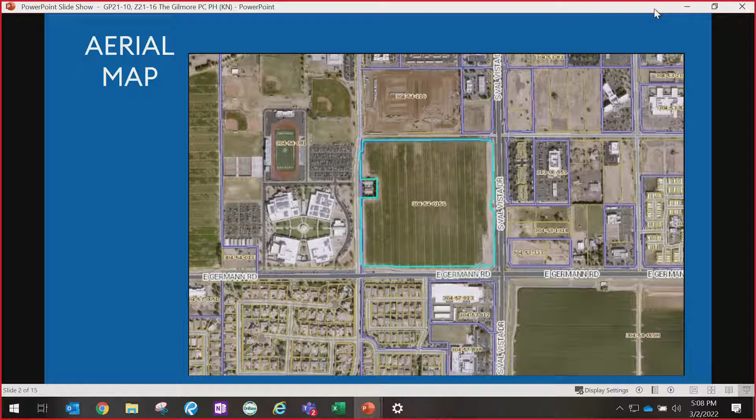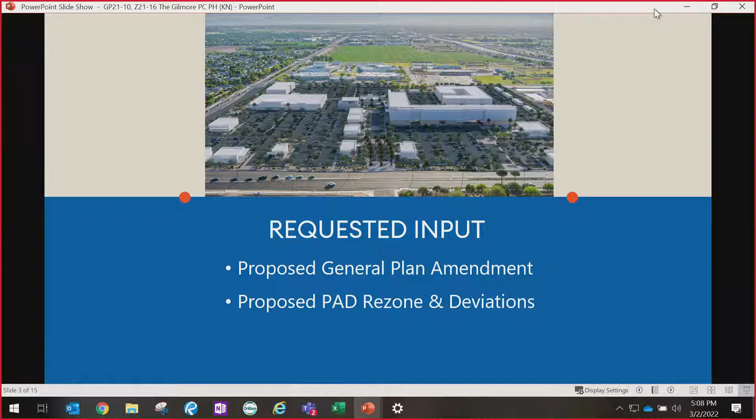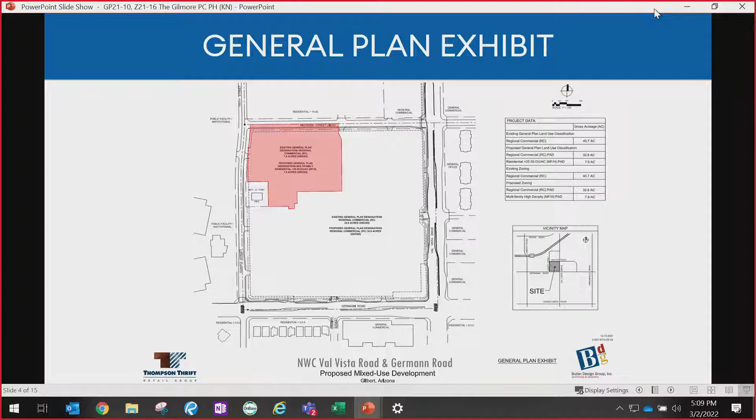So the input we're requesting tonight concerns the proposed general plan amendment, the proposed PAD rezone, and the deviations the applicant is requesting. As you can see, they're proposing a general plan amendment from regional commercial over the whole site currently, to change that red piece in the corner, about 7.8 or 7.9 acres, from regional commercial to residential, 25 to 50 dwelling units per acre. The rest of the site, about 32 acres shown in white, will remain regional commercial, and that designation will not change.

So the zoning on that little red piece I showed you will be changed. They're proposing to change it to multifamily high residential with a density range—I'm still trying to get final numbers on this—but it's going to be a little over 30 dwelling units per acre for that piece. I'll still provide more clarification and final numbers when it comes back for public hearing. The rest of the site is already zoned regional commercial, and they're not proposing to change the zoning, but changing it from regional commercial conventional to regional commercial with a PAD for the rest of the site.

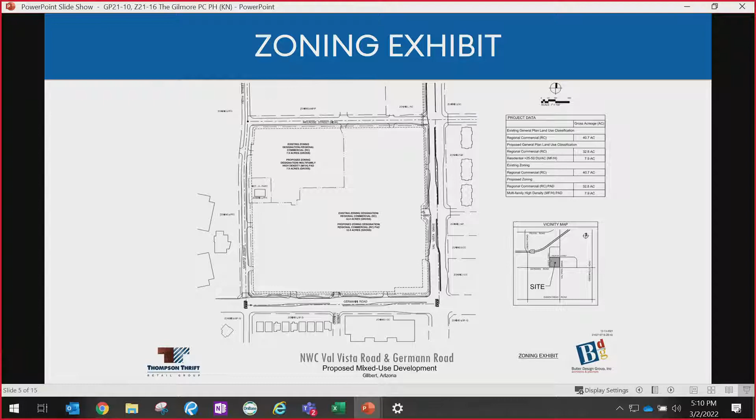So here's the proposed development plan: a total of 40 acres for the whole development, with approximately 206,000 square feet of commercial. Broken down: 65,000 square feet for a grocery store, 33,000 square feet for retail below residential—that's the loft-above type product on the site, wrapping the MFH in that far northwest corner, shown as 4-story residential retail. That's where the retail is in the loft above. Then there's 24,880 square feet of standalone shop space.

And then there's this piece behind the grocery store, labeled office 2-story. They're going to make that more general for flexibility in use, since they don't know what it will be yet, but that's 2.7 acres of land for some future commercial office type development they'll lock down later. The total residential units on the site are 302 units in that northwest corner, in 4-story apartment buildings.

And then in front of that, to the east and a little bit to the south, they have the loft above residential, and those are also 4-story buildings with retail on the ground floor and residential on the top 3 floors.

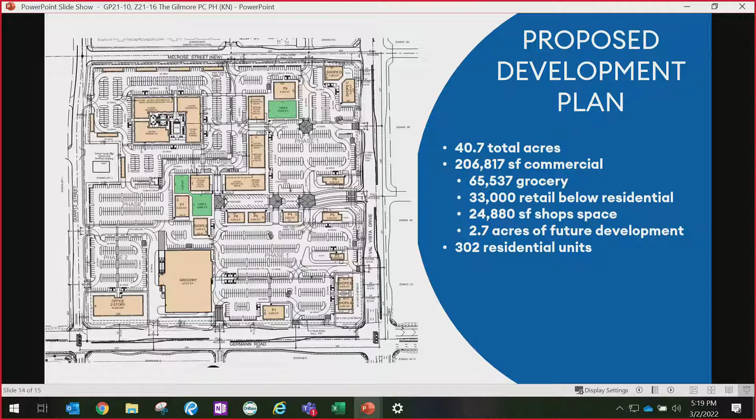Our staff report states this is a standard not eligible for deviation. However, after more research and consulting with our town attorney, we've determined that since the language in the LDC is not super clear on that, it is actually a deviation eligible for an applicant to request through a PAD or through a variance.

That said, town staff is still not in support of that deviation request, as it would increase the amount of asphalt in the parking area and worsen urban heat island effects on the site. It also reduces the amount of landscaping and open space they can have—they're already requesting 32%, which is below the 40% requirement—and it reduces shade opportunities for parked vehicles, which is extremely important here in Arizona with our hot summers. We want that beautification of the parking lot, so reducing the number of landscape islands and adding more asphalt is something town staff will not support.

One thing we will support is a reduction in private and common open space down to 32%, and private open space from 60 down to 50 percent. We think that's an appropriate request given the amenities of the existing site design and the unique loft-above concept. There are enough unique elements for us to support that deviation, but there are obviously a lot of other deviations we don't feel comfortable supporting.

So back to public participation. They had a virtual neighborhood meeting on September 2nd. Three surrounding property owners attended. The attendees expressed support for the mixed-use design, the outdoor areas, restaurants, and things. They really liked the concept of the project.

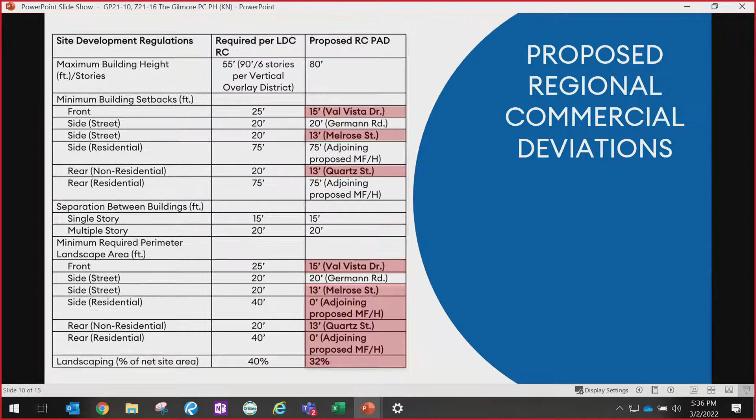So, Keith, with regards to the corner setback, is the corner you're looking at the one right on Germann and Val Vista, where they've got the 250 by 50 right on Val Vista, and then going shorter on Germann? Right, okay, that's what it is. I believe they're going to about 100 to 150 along Germann, if I'm not mistaken, but the width is still there.

Okay, and with regards to the setbacks, just give me a little bit of schooling here. We're looking at from a 25 to a 15 along Val Vista. Is that in order to take up those two buildings on the northeast corner of the property, or is that the entire length of the property that would be the deviation or setback? Chairman Simon, that would be the entire length of the property along Val Vista. Okay.

All right, anybody else have any questions or comments for Keith? Yeah, Commissioner Blazer - so my overall take, I love that they're looking to develop the full 40 acres, and I love the concept. But echoing what's been shared, I would support staff's take on the deviations.

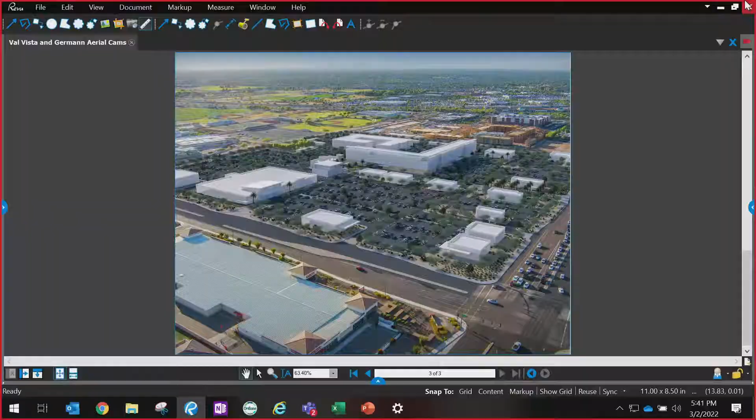The reality is, downtown Gilbert's tremendously successful. It is a restaurant hub. We're trying to create a secondary point of activity in the town. And we know that brick and mortar is hard to survive in this type of economy, but we feel like if it's anchored with enough opportunities for retail and restaurant, based on the ratios that we expect to have restaurants, we feel like we need enough parking to accommodate it. I don't want people to say, I don't want to go there because there's no place for me to park.

So it's important for us to provide what we think is needed operationally, not what is required minimum code standards. At the end of the day, the deviations we're asking for aren't because we want to be greedy or max out the site. I think we want to just be responsive to the future intended uses here.

I believe we can work together on the landscape setbacks. I believe we can work together on Val Vista. I think we can work together a little bit on the arterial intersection. I believe we can work together on improving the required amount of commercial open space requirements. There's probably room to do that.

I see an opportunity here to create something special. And it's not often you get 40 acres to play with, but 40 acres of retail can be really, really tough. So providing that right mix is important. And so what we're trying to do is ask for just the right deviations to make it work.

I think when we come back before you next time with amended changes and imagery that actually shows how this works, I think you'll feel much more comfortable with what we're proposing. And I hope that this will be something that staff can be supportive of.

All right, thank you. Before I kind of close this out, does anybody have any questions or comments at all? All right. Hang on 1 second.

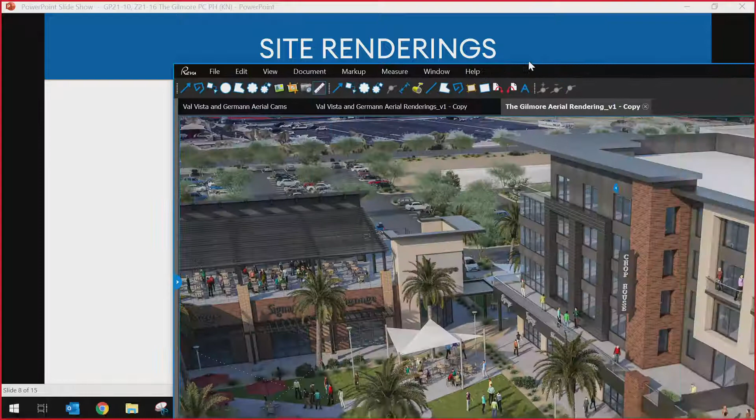8? Oh boy. Yeah, see, there's that one. I don't know if I have all those other ones.

That's the courtyard. When you drive in from the Val Vista side heading west, you terminate that courtyard. You see the level of activity that activates around that courtyard with the residential on the side of it. So these courtyard spaces serve as a reason to linger longer. We want to give our retailers hope that this site can be successful.

These aren't areas that you reap economic benefit from by providing, yet it helps make the center far more sustainable long-term. And we could see opportunities where on the weekend, maybe there's a food truck rally or some type of other special event because we have these types of spaces here.

So think of it like Santan Mall-ish. We have that Paseo in the different spots. We have 3 of those here on this plan. And the rest of those, I'll have to make sure I put them in my next presentation. Sorry about that. All right, we'll have to touch base on those.

I look forward to it, because whenever I see the renderings, usually there's the renderings of the building, and then the architects usually kind of cheat and put a mother, father, and a child with a puppy, and some really happy people high-fiving a policeman. And I noticed on some of yours, like the streets alongside, I think they just took the aerial photograph because there's like traffic barricades and junk, and you could have taken those out of there and made it look better. So I appreciate the honesty of the renderings.

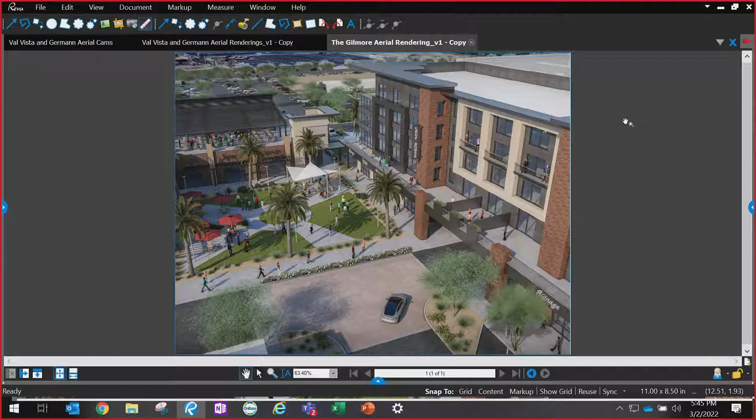Excellent. All right, so Keith, I'll just give you my final thoughts on this one. I think the parking is a conversation that needs to be had, and maybe some alternatives to what that shade could look like, I guess. I don't know how far the client or the applicant is willing to go.

With regards to the setbacks, I probably wouldn't be so inclined to approve them along Val Vista, because I understand we've already got some development and we want to keep that flow going. But along Melrose, it's a minor street. I don't know that having those garages right there is going to be that big of a deal. So some of the setbacks I'd probably be okay looking at.

I love the concept, I love the loft above. I think what the applicant is attempting to bring will do very good things for that area. So I'm excited to see this and additional renderings. I'm with Commissioner Fay - I like to visualize what it looks like, so having that would be awesome.

From there, I think it's the setbacks, and it sounds like you guys are going to work that out. The other piece I am not sure about is that back office behind the grocery store - it just kind of feels a little off to me. I understand there's availability for use there, but it's some struggle to get my head around. But I know that wasn't really in the question.

So with that, Keith, did you get what you wanted? I believe so, I believe so.

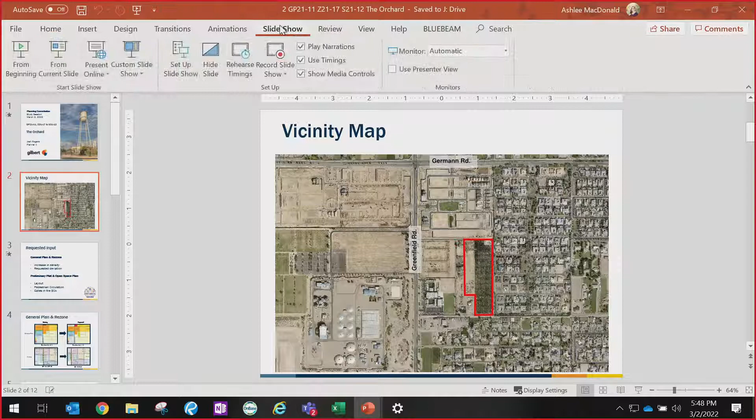While Ashlee's pulling it up, the Orchard is a proposed rezone and minor general plan amendment and pre-plat located along Greenfield Road, just south of Germann. There is a 14-acre piece of land that has long had access issues. It's remained undeveloped because there's been multiple property owners within this area, and the applicant's coming in hoping to develop 14 acres, which is approximately 4 single-family vacant lots right now, plus the orchard that you can see on the aerial as well.

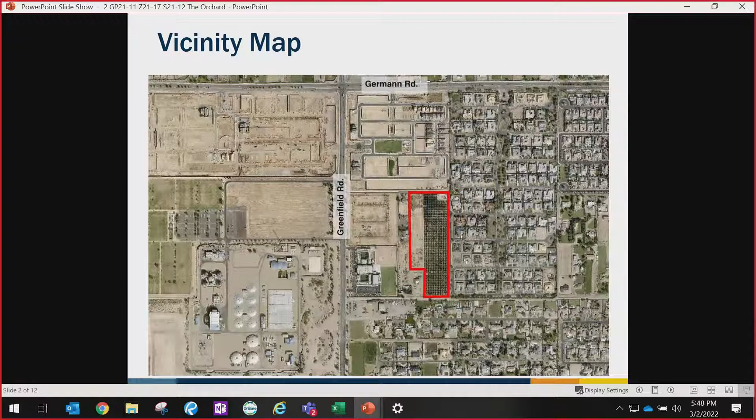So for requested input, staff is requesting feedback on the slight increase in density, the requested deviation for the zoning PAD, and for the preliminary plat and open space, we're just looking for general feedback on your thoughts on the layout. Also, we have some questions about enhancing the internal pedestrian circulation, as well as the presence of a gated community within the Santan character area.

So the request they're presenting today is to change the general plan from 0 to 1 dwelling units an acre to 1 to 2 dwelling units an acre, and a requested rezone - those single-family lots were SF43, and the orchard is currently zoned SF35. They want to change those to SF15 with a planned area development.

Overall, staff's initial thoughts on the proposed general plan change in land use is that it does fit in with the character of the area - it meshes pretty well with what's currently there. You have 2 developments of single-family detached north and west of the site. You have the White Wing residential community, which is SF10, directly east.

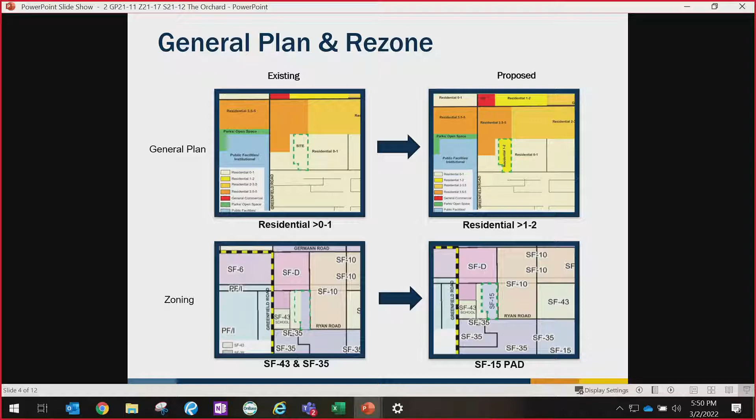In terms of the deviation, the request is to modify the side setbacks of the homes. Right now, you're required to have 15 feet on both sides. Applicants are requesting to divvy that up, with 10 feet on one side and 20 feet on the other. Seeing minimal impact to the outside community, and that it's meant to enhance the local streetscape, staff is generally supportive of that.

Residential input during the neighborhood meeting was generally that adjacent homeowners didn't want to see more than 1-story homes on this land, but as with theirs, they are allowed by right to have 2-story homes.

They were also requesting a landscape buffer between the White Wing community and this one. The applicant let them know that we typically try to deter strips of landscape between rear walls, as it can create a corridor of mischief. But the applicant has offered to increase the depth of the lots an additional 10 feet.

So for the proposed development plan, it's for 22 lots, 2-story homes on 120 by 130 foot lots utilizing a private street network. There is only one access to the site through the north, which is to the right, through Superstition Drive. Ryan Road to the south is not actually a road.

You cannot access that. That is owned by RWCD, and they don't want people driving on it, which is also one of the reasons why this area has remained undeveloped for such a long time, because there's been access issues. On the southern lot, I want to point out that the lot to the left of lot 10 is an unbuilt home that has remained half-built for almost over a decade due to the inability to get utilities and access to the site.

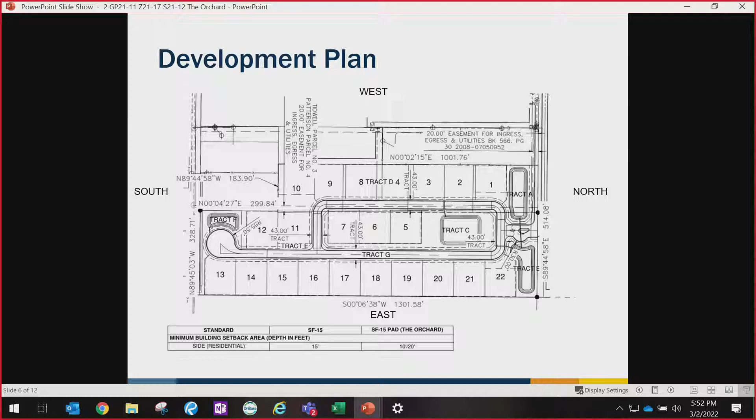The applicant is proposing to include a connection and an easement to them to allow access through the site to Superstition Drive to the north, allowing that property finally the ability to continue the home.

In regards to open space, total open space is approximately a little over 20% of the site, or a little over 2.5 acres. They are incorporating a lot of the existing citrus trees from the orchard into the landscape plan, which we definitely appreciate.

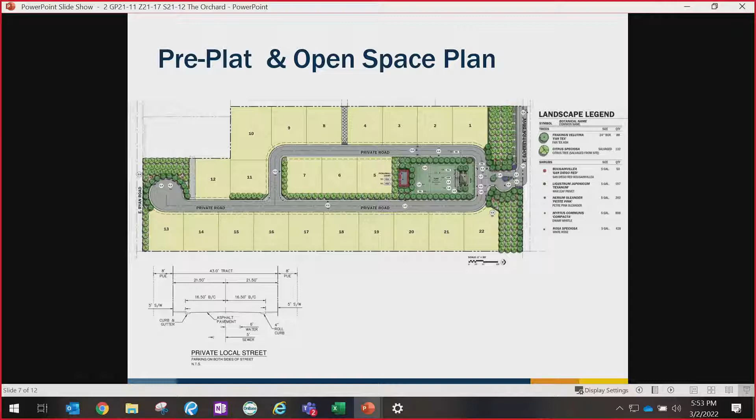In terms of the open space and the rest of the wall plan, it is a gated entrance. It features an unoccupied guard shack, with citrus trees lining the street. A centralized amenity area is located right at the entrance, including a barn-themed ramada. You can see in your packet picnic benches, pickleball courts, and so on.

In first review, staff had requested the applicant remove the front gate, because this is a Santan character area where it doesn't explicitly say you can't have a gated community. The whole idea behind the Santan character area is to blend rural and suburban, to keep the theme and feel of the agricultural community Gilbert originally was, with wide open spaces and not a lot of brick block walls and so forth. So we did request that of them.

The applicant is vehemently against removing the gate. They definitely want to keep that there. I did include in the staff report their exact reasons why, but essentially they want to keep the gate due to the high-end nature of the homes, as well as the presence of other gated communities within the Santan character area, which staff has tried recommending against as well, but those recommendations weren't taken.

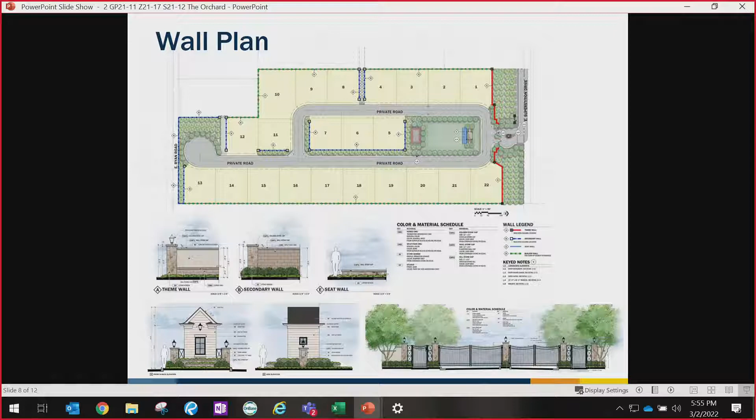Staff has also requested the applicant enhance the internal pedestrian network. They do have sidewalks right now, but keeping with our tradition, we like to have shaded walkways, even in residential communities as well as commercial sites. So we requested a detached sidewalk with shaded trees separating the private road from the sidewalk, to give more separation between traffic, which will be minimal, and pedestrians.

The applicant is open to the idea, it's just that if they offer that detached sidewalk with a tree-lined street, it will eat up the 10 feet of extra depth that they've added into the lot. So we just want to hear the commission's thoughts on our preference between the added depth or the shaded tree-lined street.

Just to recap - not bad for time. Just want to get the commission's input on the increase in density, which I didn't mention, but overall density is about 1.5 homes per acre. Want to get the commission's feedback on the side setback deviation, as well as the comments I made on the preliminary plat and open space. I'll be happy to answer any questions.

Thank you, Josh. Questions or comments for Josh? Commissioner Bianchi: Thanks, Chair. Just a real quick question, Josh.

Looking at this layout, I notice there's no connection to Ryan - does the drainage or slope of this all drain towards the basins, towards Superstition Road? I don't know if that's just an entry feature or if that's truly following the drainage pattern. I believe it does - Engineer Nathan says that yes, it does. Thank you, okay thank you.

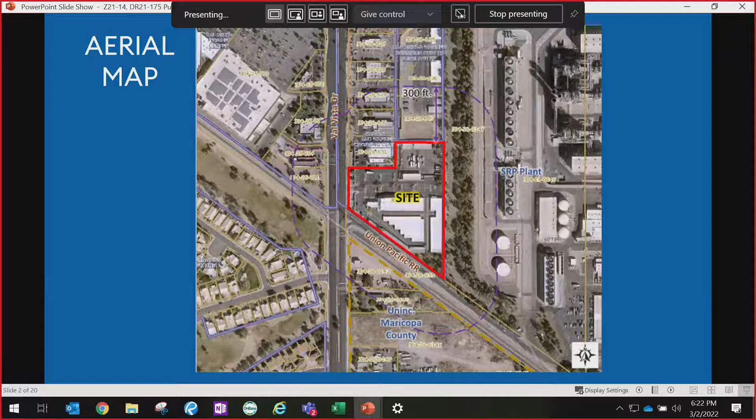We'll go over that a little more in just a second. But the requested input tonight that I would like to get from you is on the proposed deviations, the overall design of the site, and the colors of the existing and the proposed building that I will show you.

So the zoning exhibit, the site, like I said, is 5.8 acres. They are proposing to rezone the site from community commercial that has a PAD on it and is part of the Val Vista and Warner Crossroads Center master plan. They're proposing to change that zoning to general commercial with a planned area development.

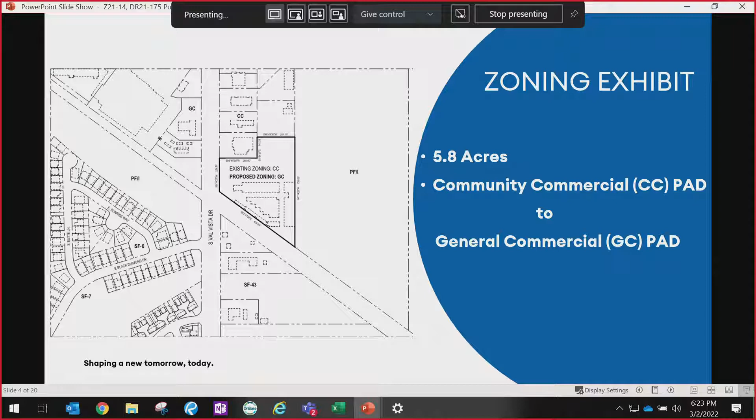The proposed development plan and site plan, which are in front of you, it's basically the same document as of right now. So on the site, you can see that the south half of the site has 5 existing storage buildings on them. The northernmost building is a 2-story building that actually has about 15,000 square feet of storage on the ground floor right now.

And then the rest of the remainder of the building, which is about, I think it's about a 30,000 square foot building, has a call center on the top. So that call center on the 2nd story will be removed and remodeled and replaced with storage units, about 16,000 square feet of storage. Approximate total storage as of right now on the site is about 62,000 square feet.

Then the applicant is also proposing, to the north of those existing storage buildings, as you can see in front of you in that kind of hatched L-shaped building, about a 143,000 square foot new storage building. Oop, I got some text cut off there, I apologize. A new storage building about that size, about 143,000 square feet.

So total numbers, storage numbers, when it's all said and done, is going to be about 222,000 square feet of storage. Now I do want to note that in your staff report, I jumbled up all the numbers and messed it all up, so I don't have all the accurate information from the applicant yet on totals. I'm still trying to secure that. So I messed up some of the totals, I apologize. My next staff report will all be correct, I promise. I just want to note that I kind of messed up the numbers, just in case some of you are like, I'm going to question Keith on this later. So I do recognize that, and these are the correct numbers that I have as of right now.

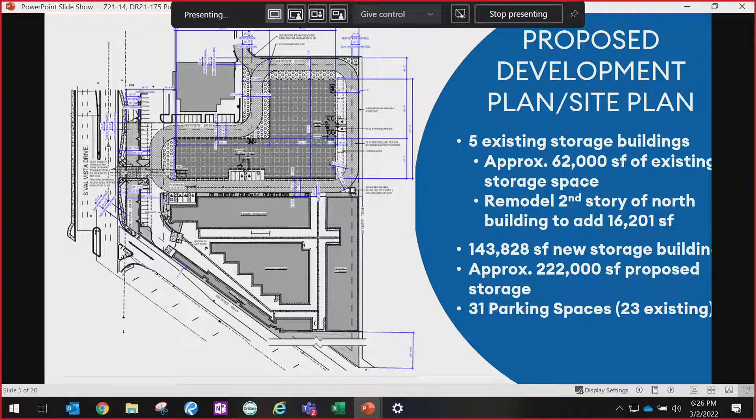So the only new parking spaces are going to be those parking spaces on the south side of the new storage building, and then some loading bays and stuff on the back side of the building on the far east side. Everything else will remain as existing today. All the drive aisles will remain as existing, except for the new one surrounding the building, which is for fire purposes. But all the drive aisles in between all the existing buildings will stay the same as they are today.

So with this proposed PAD and deviations, the applicant is proposing to bring all those non-conforming development standards into compliance with the PAD. That's why you see some of these weird, funky deviations, like 4 foot 8 inches along the southern boundary where the buildings are, and then along that side street, 1 foot 8 inches because there's a wall that encroaches into that setback a little bit. And then along the eastern boundary it's 0 — that building is literally on the property line, right next door to a power plant.

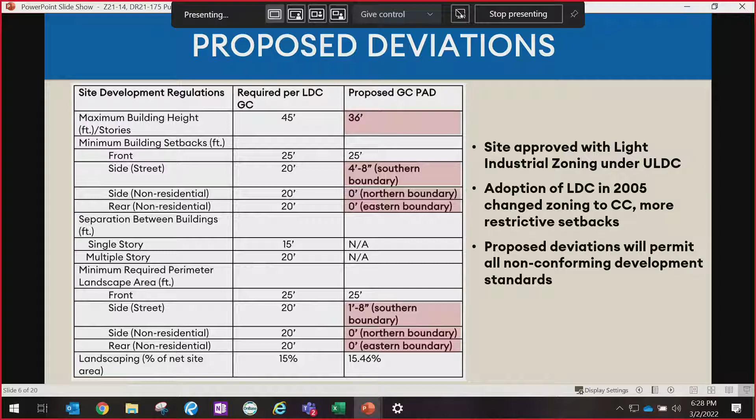So town staff is in support of all of these deviations, and we know and understand why they are the way they are, but we want to bring this site back into conformance and not be illegal non-conforming any longer. You'll also notice the top one, maximum building height, is 36 feet. Town staff would like to restrict that building height to 36 feet instead of it potentially being 45 feet in the near future. So that's all the deviations.

The landscape plan shows 15.4% landscaping on the site. They're going to refresh the landscaping along Val Vista Drive because a lot of stuff has died over the years and Palo Verde trees have probably been blown over. So they're going to refresh all of that, and they're also going to add new landscaping around the new building in certain spots and areas where they can do that.

And then the proposed elevations — this is the elevation of the existing two-story building, which today looks a little bit different. If you've driven by and looked at it, you'll notice the entrance has kind of a lighthouse-type design. They're going to remove the lighthouse design and propose the design shown on the top west elevation, a little bit more contemporary. Around the building they'll add some more paint, and they're going to add some orange at the cornices and things like that. You'll notice if you go out there today, they've already kind of painted it.

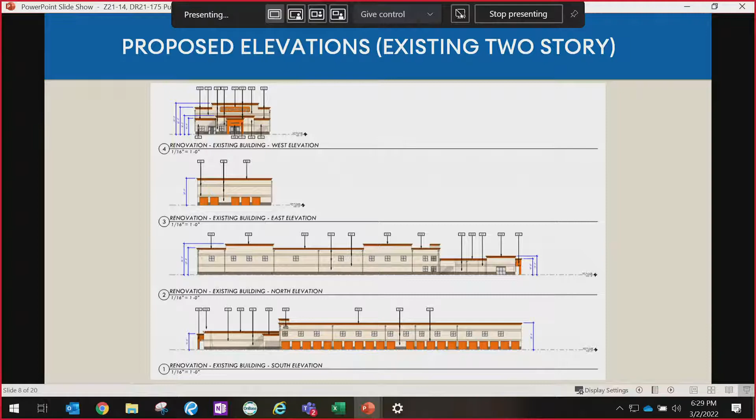So I don't know if they're going to be modifying the buildings they've painted prematurely to match this, or if they're going to modify the drawings to what's painted. I'm not quite sure yet — it's still early on in the process. But that's the existing building. The new building they're proposing is, like I said, about 36 feet tall to the top of the parapet.

And we're confident that we can come to an agreement with them on that. So that's a concern that we have. And I'd like your input on that, by the way.

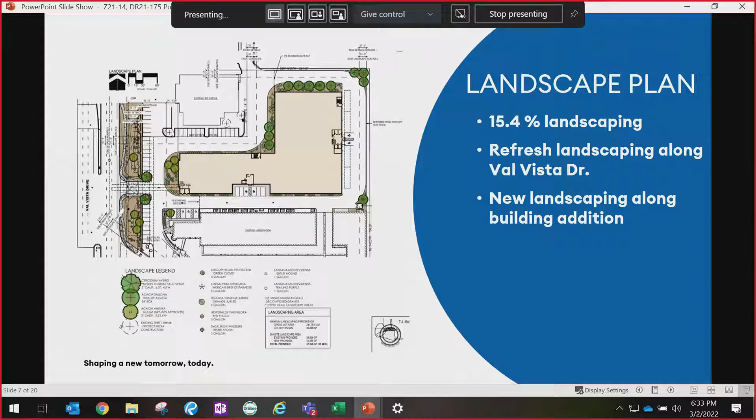Okay, yeah, it's more. I guess what I'm focusing on is more the north and south elevations. There's just the long flat runs, and in the past the town has always pushed for four-sided architecture and having some sort of architectural embellishments to break up those types of planes. So if that's still staff's kind of thinking these days, I would strongly support that.

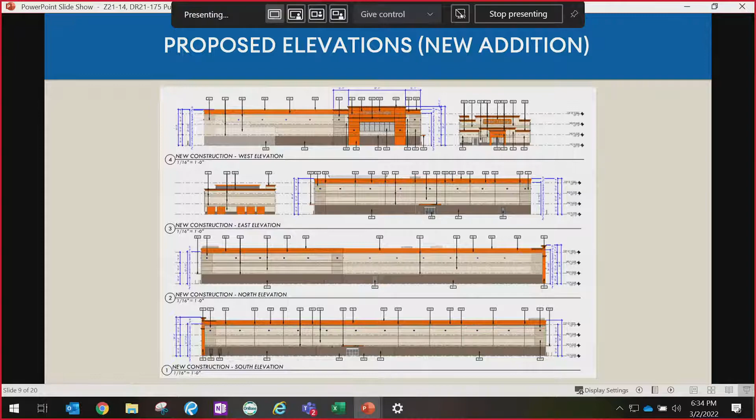Chair Simon, Commissioner Anderson, it is still our thinking. See, this is the existing building on the north. See how it has those varying heights of parapet walls and some vertical movement? I believe that could be accomplished on the north and south elevations of the new building like you're talking about. So yes, I would agree that's probably a good idea to do. And that goes along with complementing that building. So we would like the applicant to take a look at doing that. Thank you. All right, thank you.

Anybody else? Questions or comments for Keith? Commissioner Blazer.

When you drive by this, you can hardly see it where it exists. So I think it's going to tuck back really nicely and hardly going to be seen because it's L-shaped and it wraps around the retail building adjacent to it. I think it's at the Big Five there, but yeah. So I would be in full support. And if the elevations need to be changed up, I'd support that. I'm a fan of reducing the orange.

You asked for input on that. I think when we approved the public storage in South Gilbert on Val Vista, we said no orange on one of the elevations, and they accommodated it. So maybe the same amount of orange that's on the existing building adjacent to it.

I could live with that. So, with this being a storage facility, has U-Haul had any disagreements with this orange on these types of buildings? I was wondering if that's why all these facilities... Yeah, because most of these larger companies get a certain color that they're associated with, they trademark that. So I was surprised. I zoomed in and it just said Public Storage, and I thought this was a U-Haul at one point because of all the orange, but it doesn't look to be. So that was just a curious question.

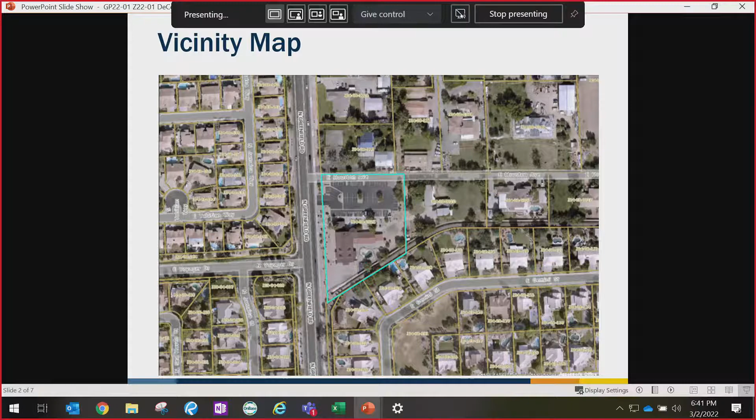It's against a major arterial. As for the allowable uses, there was some concern at the neighborhood meeting regarding if this applicant's business moves elsewhere in the future, what other types of things could come in here. They had particular concerns regarding something like an urgent care, which would be allowed in a neighborhood office, but still, in staff's opinion, that's typically a very low traffic type of use. Even if that was the worst case scenario, that would still be fine for this site.

Also, other types of businesses that could go in here, like a brewery or a distillery, which in my opinion wouldn't be too bad either. Also just other small types of office uses, not very high in traffic. There's the existing structure on site that they intend to make minimal, if any, changes to.

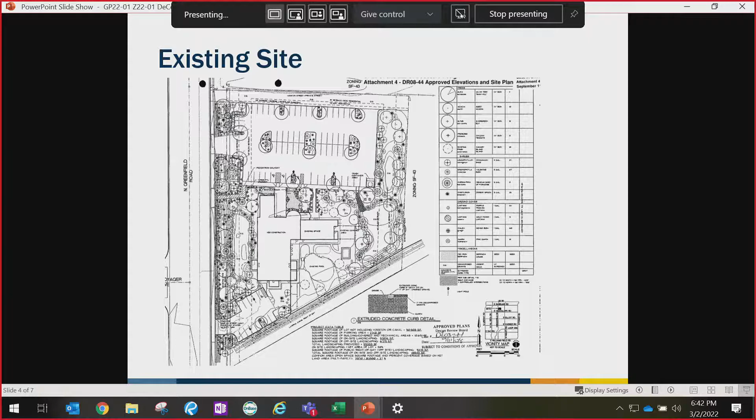There are not any site design issues. The current site plan, which you see, was approved, I think mid-90s or late 90s—or I'm sorry, 2008. It is in compliance with the requested zoning district. So just in closing, I wanted to hear the commission's thoughts on the general plan and rezone change, since it's going from residential to commercial. No concerns on staff's end, but we definitely would like to hear your thoughts.

Thank you. All right, questions or comments? Commissioner Bianchi: Chair, Josh, a couple quick questions. Given the use, I'm just assuming this will just have normal business hours of operation, kind of daytime, early evening. And this will be just a design and administrative office, correct?

It's not going to have construction materials or delivery or storage on site? No, not that I believe. I don't believe the storage of materials in this zoning district would be allowed outside, at least. And even if it would have to be within an enclosed yard, which I don't believe it is, there's no space for that here. And if that were to happen, it would have to come in for design review and full staff review if they wanted to do something like that.

Okay, yeah, I think it's great, especially adjacent to all the residential on each side. I think it's a great reuse. And the other important thing is there's no deviations being requested. So what a welcome change, it's amazing. Other than that, yeah, I've got no initial issues with the request.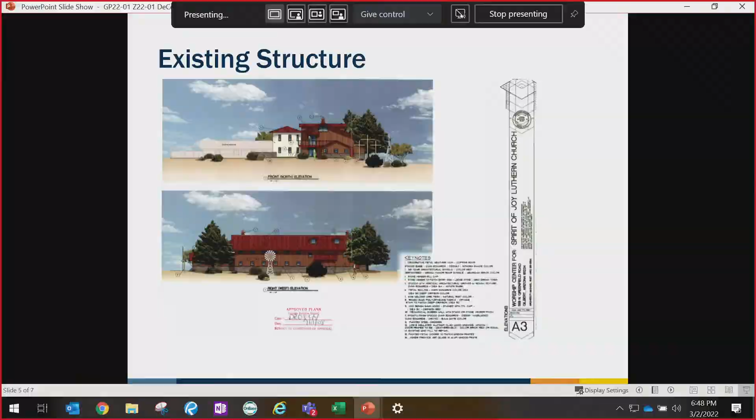All right, and I am good with it as long as they don't come back asking for a liquor license later on down the road. I would be- no, I'm just kidding. So no, I'm totally good with it. I think it's a great use for the property, and I have no problem with the rezone or the general plan amendment. So at this point, Chairman, Commissioners, thank you.